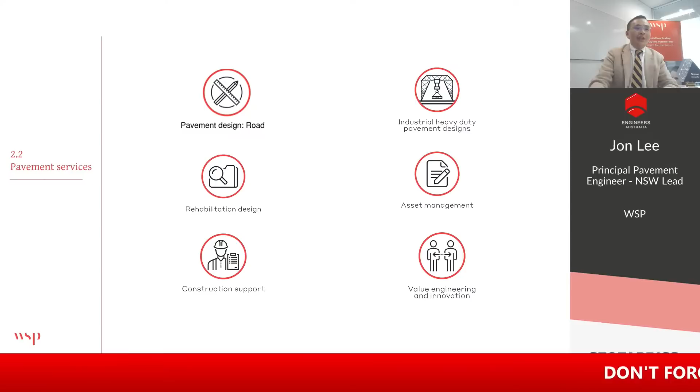So for the first, this is the one in the job, say the pavement services we're providing. Yep, similar to the last one.

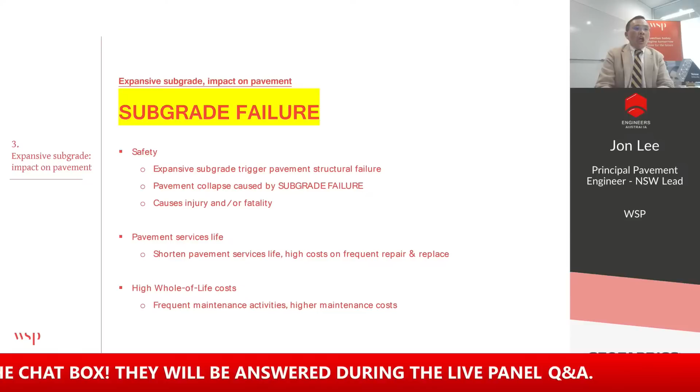For us, the major issue with soft, expansive subgrade is subgrade failure. When the subgrade fails, we lose the support of the pavement, and once it loses support, we cause safety issues, which can cause life or injury. It's a serious impact.

For that part, it's our responsibility to provide a safe design and safe output as well. The next thing is, even if the pavement is still functioning with some distress, we need very frequent maintenance, which means we add on the cost.

Just like I showed at the start, whole of life is a very important aspect. It's not just design and construction—maintenance is a key part as well. So overall, for our output, we need to make sure we have functional deliverables and effective cost.

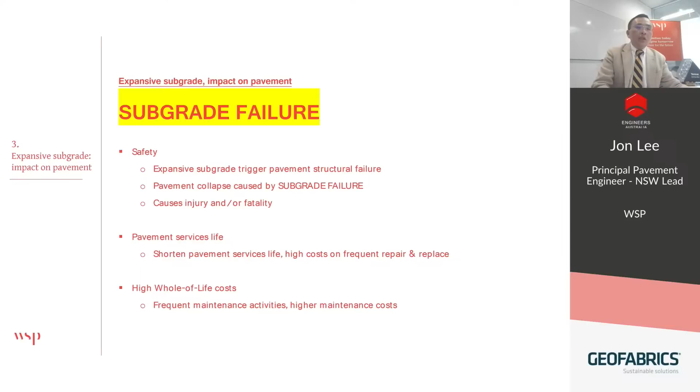Right now, allow me to share some photos of a failed proof roll, because this has been through the proof already, and this happened last year when we had over 200 days of rain in New South Wales.

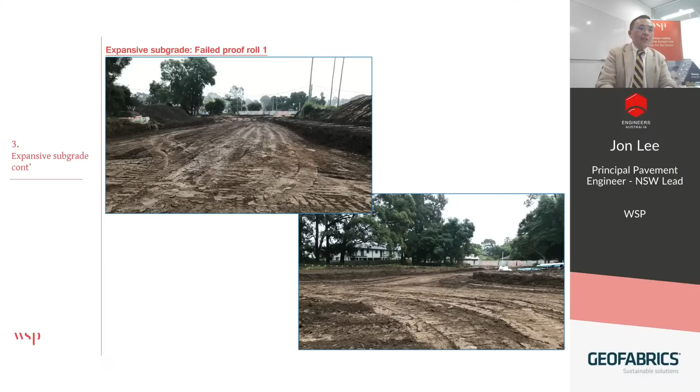So we tried our best to dry the subgrade and make sure of things as well, and we still came up with an issue—after we did compaction, proofing, and stuff, it still looked like this. More photos of that as well.

So for us, we're not taking chances. For a situation like this, there are two approaches. First, we don't have the luxury during rainy days to wait for it to dry, because it delays the construction process. At the same time, we need good quality control, just like my colleagues said.

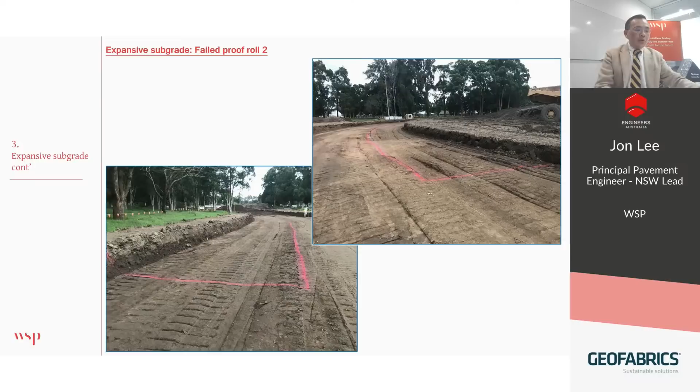One thumbprint on failed proof roll is a huge room of improvement in subgrade remedial works. For us, we need to get things right. For the next step, allow me to show some examples.

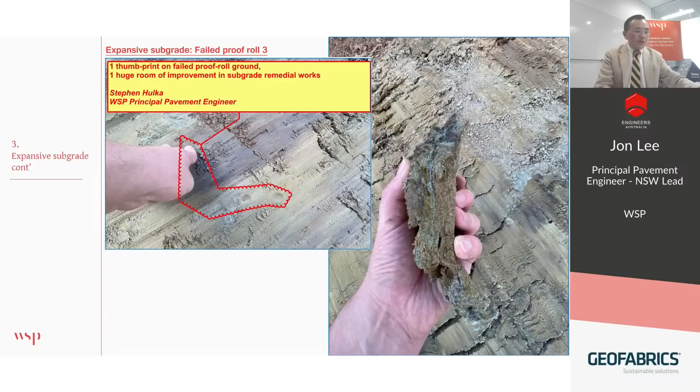First one, like I mentioned before, when I do a new road for Transport New South Wales, this is the design approach. I need to work together with Geotech and study the bore logs, the CBR lab tests as well. The key is when we find soft areas, we need to comply with the Austroads Guide to Pavement Technology Part 2, also the transport supplements to Part 2.

Then we apply the layer called control subgrade layers. Whether or not we do in-situ stabilization, maybe lime or cement, we determine case by case with the project requirements.

The key point is, on top of the stabilized layer—here we have 300 mil—we also need to put the Tensar TriAx TX100 or equivalent on the original subgrade. I'll discuss this further later, but bear in mind we have a few choices here.

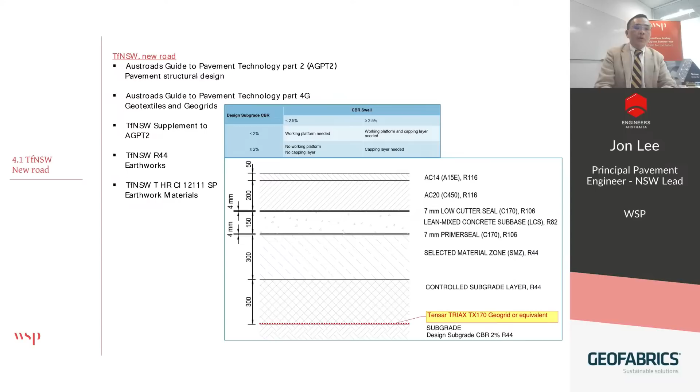First thing is one or two layers of geogrid, where you put the geogrid on two layers, and in between, in-situ stabilized materials—whether we choose lime or cement. We'll go further into this in Q&A.

For the next one, this is for the boundary. For maintenance work, we might not have the luxury like greenfield sites with one meter and all that. So for brownfield or contaminated areas, we might have very limited area and excavation depth to work with.

For maintenance work or rehabilitation, on top of the geogrid, we need to make sure the subbase or the materials we put back are synthetic. The key is that these are self-compacted, so we have less disturbance to the original ground. Think about this - for this line, you have services over there. It can be existing services, or even if not, we might not have the luxury to say that gas pipe is 1 meter away, or other services 600mm away. So we need to work together with utilities, drainage, road designers to file integrated design.

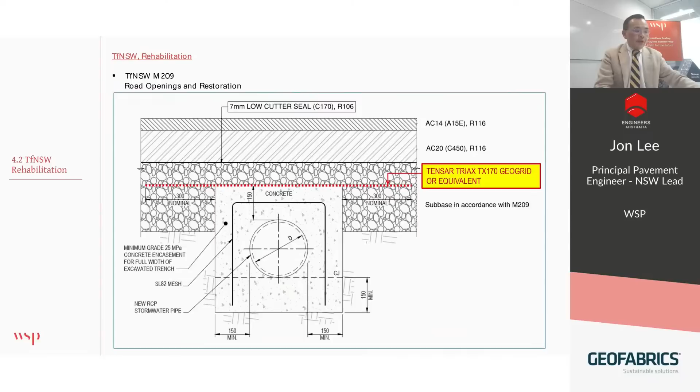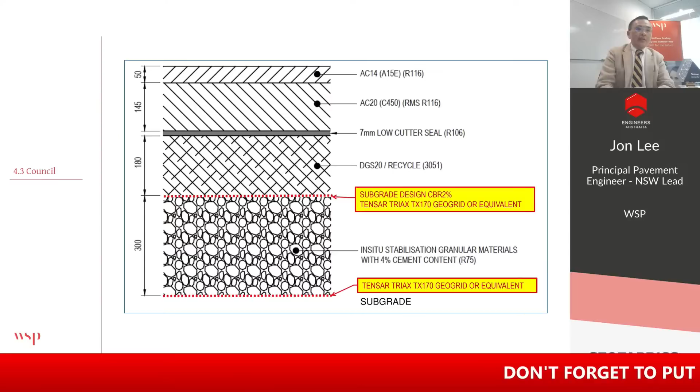For the next one, this is for a council job, and this profile is being delivered during the times of heaviest rain, for approximately 200 days or so. So as I mentioned, we don't have the luxury to wait for it to dry. So we're keeping a balance - we're looking for 2 layers of geogrid, with cement stabilization as well. It's massive, and the key is in the end, we're able to get these pavements constructed. That's the reason I'm doing the lesson with the asphalt and stabilized material, because in that situation, I'd say this is an appropriate design approach.

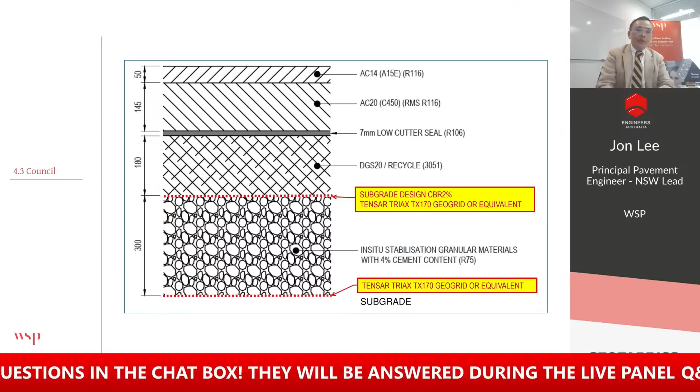One tip as well, which I mentioned in the conclusion - when we do a proof roll, don't put the geogrid down and do the proof roll. You just waste your effort and waste the money, because after the proof loading and stuff, it will ruin the geogrid.

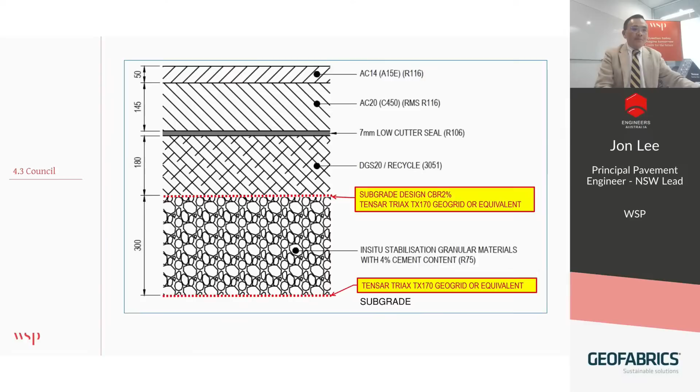This one I'm just going to touch briefly - this is for the port project we have done as well. Make sure we put that geogrid and the stabilized materials on the subgrade level as well, because the key is, especially for heavy loadings, we need those. It's not the same mode like a road where it's 8 tons in one direction, we can expect 4 tons - it's for all directions as well. So we need to make sure we have a safe design for that approach.

Most importantly, for all design, one of the key things is we need to make sure there is a sufficient subsurface drainage system, to get the water out from the pavement layer and make sure there's less chance of it becoming saturated. This is our key role, because once it gets saturated, it fails, and they lose upstream - they will come with a subsequent knock-on impact.

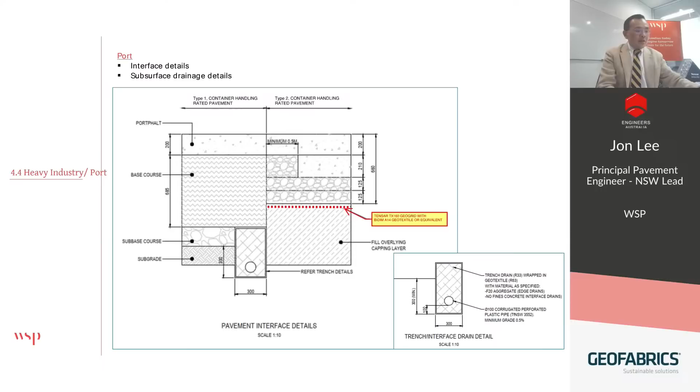Okay, thanks for that so far. This is the one I'm going to share with you - we can talk more on Q&A as well.

First thing - for those stabilization work and geogrid work, it's not a strict design approach or deliverable to minimize the excavation depth. In a greenfield or based on project requirements, it's not the way to say 'I want less earthwork,' unless we have a very good reason, like contamination in the area or utilities we need to consider. We can't just do it that way - cost saving alone is not a strong reason to go for less excavation depth.

As a designer, my standing point is I need to design fit to purpose and meet the requirements of the design standards, specifications, and project requirements. Here I borrow the idea from rail - SFAIRP. For my deliverables, I have to ensure it's as far as reasonably practical, because like I mentioned before, if I produce good drawings but the contractors can't construct it, I'm causing trouble instead of being a problem solver. So we need to bear this in mind.

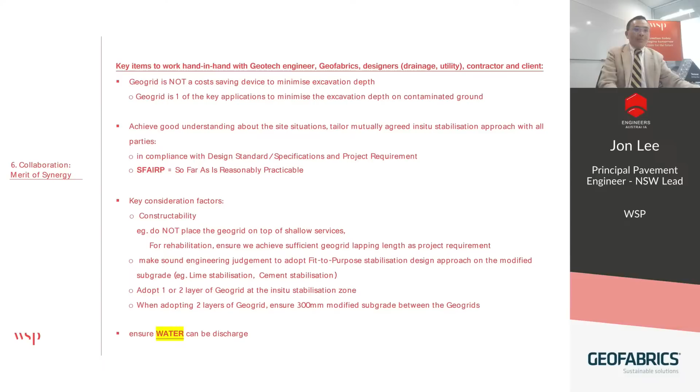That's the key points for us today. Thanks for that, and I look forward to answering more questions during the Q&A. Thank you.

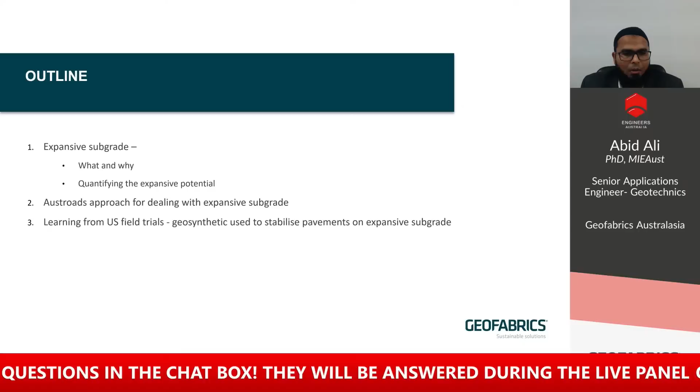The outline of today's presentation is as follows. First, I'll talk briefly about the problem of expansive subgrade and why it is a problem when it comes to pavements, and also how the expansive potential is generally quantified. Then the recommendations given in standards for dealing with expansive subgrade, what we can learn from field trials carried out in the US where geosynthetics were used to stabilize pavements on expansive subgrade, a numerical study undertaken to understand the benefit of mechanical stabilization for pavements on expansive subgrade, and geosynthetics which can be used for pavements on expansive subgrade.

In conclusion, so what is an expansive soil? An expansive soil is a soil that swells on wetting and shrinks on drying.

So why is it a problem when we construct pavements on it? In pavements, generally most of the moisture changes tend to occur towards the edges and less towards the centerline. This gives rise to a differential volumetric change across the width of the pavement. So when the subgrade swells on wetting, there's more swelling towards the edge and less towards the centerline. Similarly, when the subgrade shrinks during dry season, there's more shrinkage towards the outer side and less on the inner side. This gives rise to differential movements across the pavement.

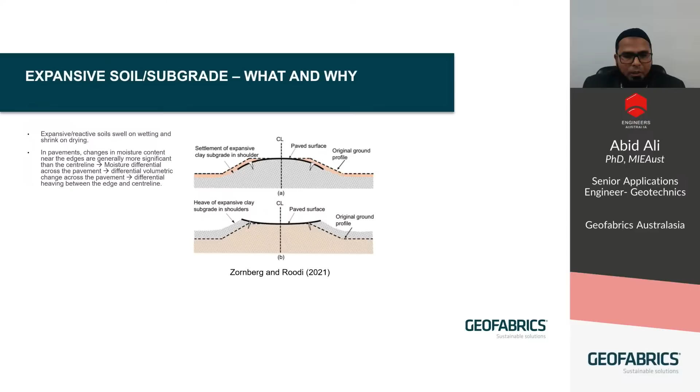Now, when the pavement is subjected to repeated cycles of wetting and drying, this can impose significant stresses on the pavement and cause it to crack longitudinally, as we can see in this figure.

The damage caused due to expansive soil is estimated to be between 9 to 15 billion US dollars in the US alone, and half of that comes from damages to pavements on expansive subgrade. In South Australia, the damage is valued at $1.46 billion for houses constructed before 1981, and it results in $20 million per year for water main breakages and $60 per square meter for pavement repairs for a local city council in Adelaide.

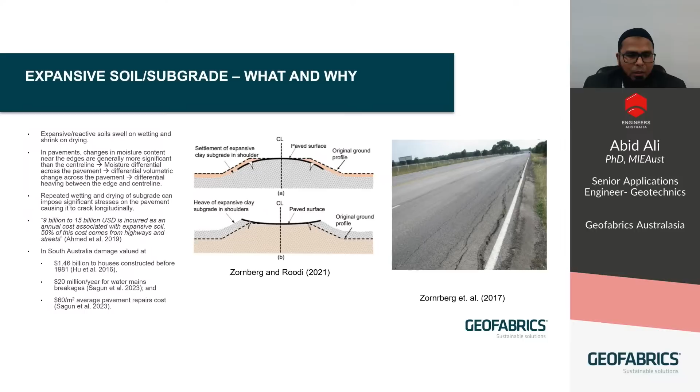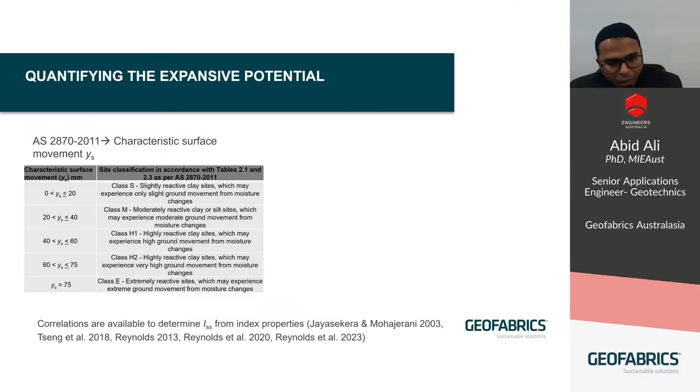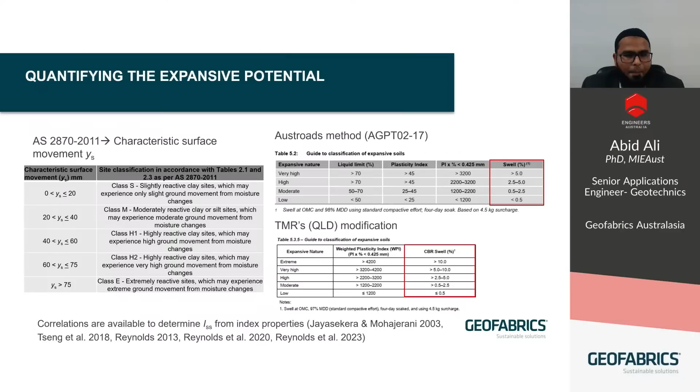All right, let's look at the approach given in Austroads for dealing with expansive subgrade. If you look at the Austroads Guide Part 2, a number of recommendations are given in clause 5.3.5 dealing with expansive subgrades, but there is no mention of geosynthetics.

A common practice is to use a minimum amount of cover material of low reactivity. This approach is called the cover method.

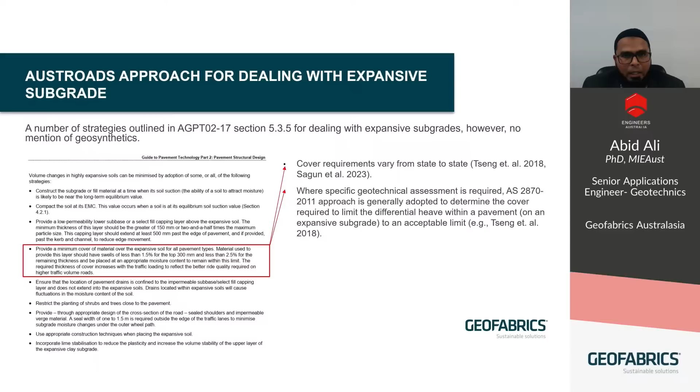The cover requirements vary from state to state, and where specific geotechnical assessment is required, the AS2870 approach is generally adopted to determine the cover required to limit the differential heave to an acceptable limit.

The cover thickness depends on several factors such as the depth of suction change (HS), the crack depth, presence of any bedrock or water table, the shrink swell index used to determine the characteristic surface movement (YS), the acceptable differential movement, as well as the design traffic.

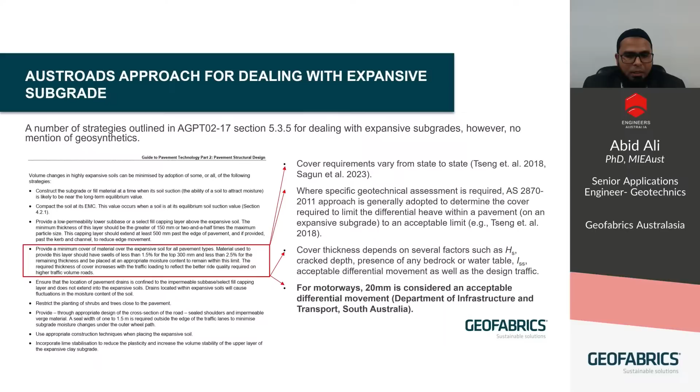For motorways, 20 millimeters is generally considered as an acceptable differential movement.

Now let's look at a few terms or mechanisms which are quite important to understand when it comes to pavement geosynthetics in expansive subgrade.

When we talk about pavement geosynthetics, the term reinforcement is quite commonly used. From a pavement perspective, this means that a geosynthetic is anchored at two ends, and when a vertical load is applied, it undergoes deformation and mobilizes a tensile response, providing some sort of benefit. So for reinforcement, there are two things to note: tensile strength is important, and deformation is required to provide any benefit.

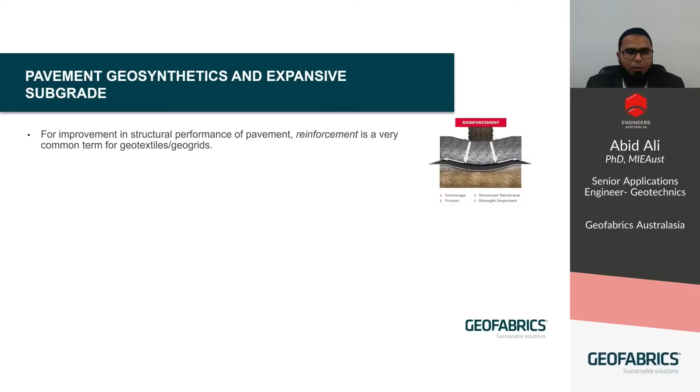The tensile strength is not important for stabilization to take place. Rather, the soil geosynthetic properties are important, and the geosynthetic interacts with the soil and improves the properties of the soil. Therefore, deformation is not required within the geosynthetic, in contrast to reinforcement.

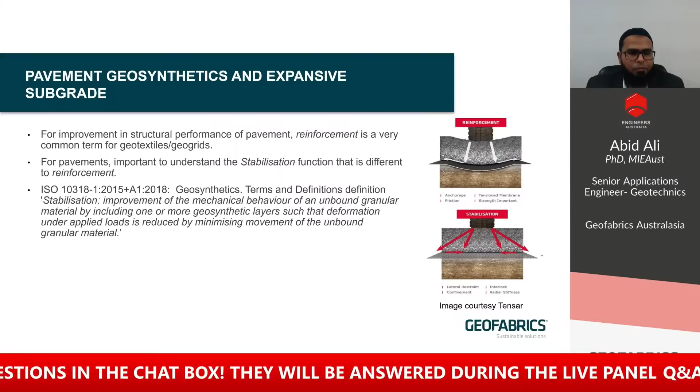So in today's presentation, we will see how geosynthetics can help pavement on an expansive subgrade by way of mechanical stabilization, and another function, by reducing the moisture differential across the pavement.

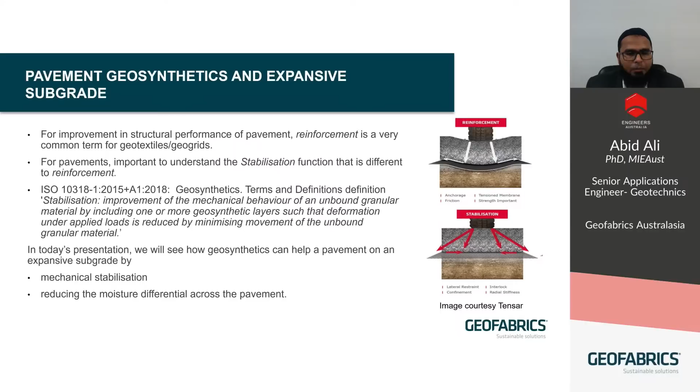So in the field trials reported in the paper, 5 sites were monitored in Texas, USA, and a variety of geosynthetics were used: biaxial geogrids, multi-axial geogrids, and polypropylene geosynthetics.

All case studies were located between a TMI of -20 to a TMI of +20, meaning a suction depth ranging between 3 to a meter and a half. The pavements were generally uncurbed, crowned at the center line, and sloping to the sides with V-shaped ditches on either end of the road.

It's important to note that each test section within a case study had the same environmental conditions and vegetation. The pavement performance for each test section was quantified in terms of a parameter called the longitudinal crack index, among other parameters.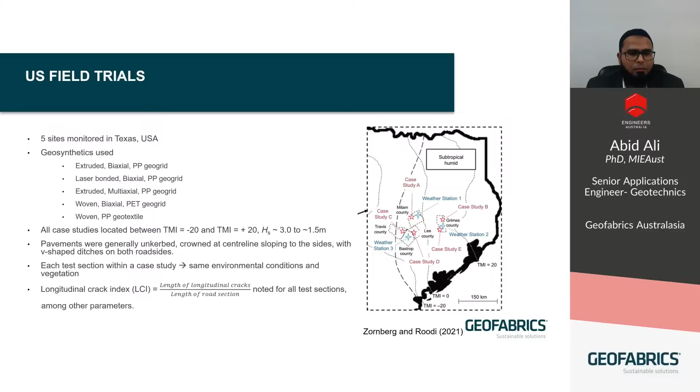So let's look at the first case study, which is FM1774. The average annual daily traffic at the time of construction was 1100. The PVR for site B1 varied between 30 to 65 millimeters, and for site B2 varied between 30 to 45 millimeters.

PVR, or potential vertical rise, is a measure of the reactive movement of a site, and this approach is generally adopted in the US.

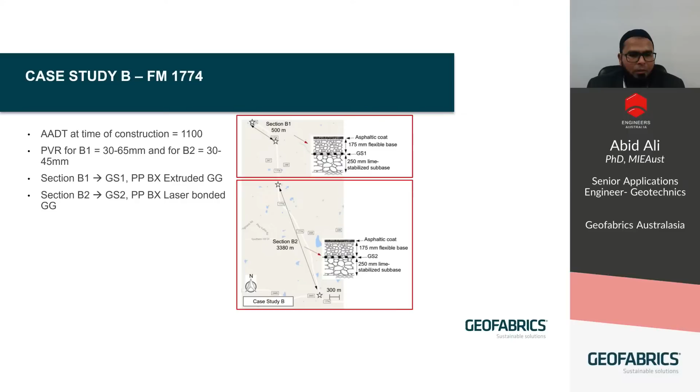So section B1 was where a polypropylene biaxial extruded geogrid was used, and in section B2, a polypropylene biaxial laser bonded geogrid was used. Both the geogrids met the Texas DOT spec for geogrids.

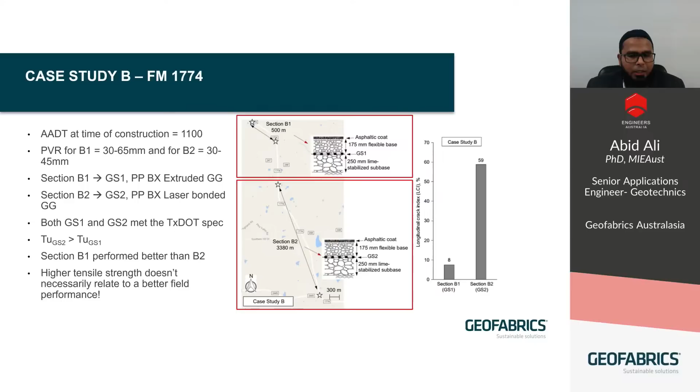It must be noted that the tensile strength of GS2 was greater than the tensile strength of GS1. But if you look at the field performance, section B1 actually fared significantly better than section B2. This leads to the understanding that higher tensile strength doesn't necessarily relate to better field performance.

Let's look at the next case study, from State Highway 21. In this case study, 5 sections were analyzed. The average annual daily traffic at the time of construction was 5,300. No PVR information was available for this case study.

The liquid limit varied between 40 to 58, and the PI between 26 to 41. The subgrade was classified as a highly plastic subgrade. Out of the 5 sections, biaxial geogrids were used in 2 sections, D1 and D2. In the remaining 3 sections, multi-axial geogrids were used. Again, it must be noted that the pavement thickness is the same in all the sections.

What is noted based on monitoring of field performance is that multi-axial geogrids resulted in better pavement performance compared to biaxial geogrids.

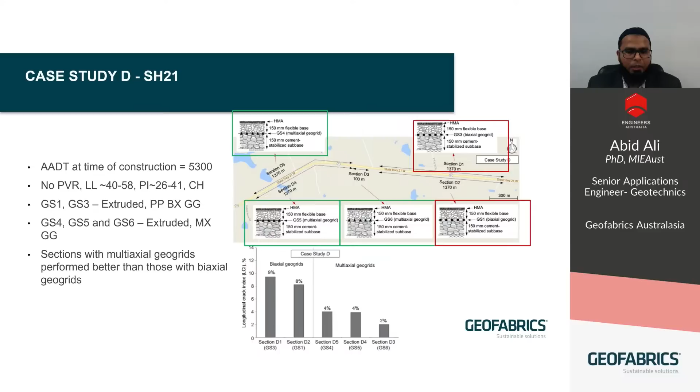So what do we learn from the US experience? From case study B, we learned that higher tensile strength does not necessarily relate to better field performance. Rather, it is important to understand the geosynthetic soil composite properties. And from case study D, we also learned that multi-axial geogrids performed better than biaxial geogrids.

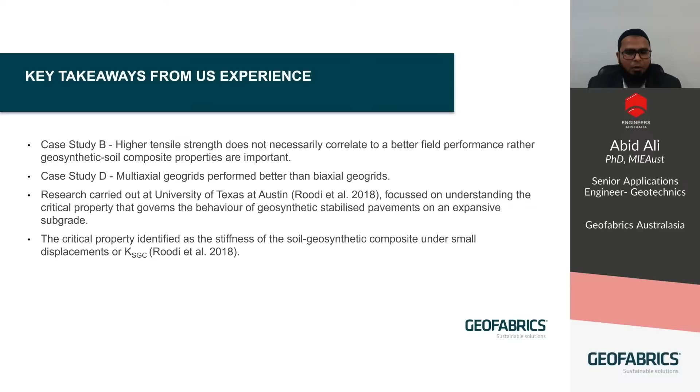Further study was undertaken at University of Texas at Austin to understand one single parameter that correlates well with field performance. The critical property was identified as the stiffness of the soil geosynthetic composite under small displacements, called KSGC.

Now, based on the lab testing carried out to determine KSGC and based on the field performance, it was noted that multi-axial geogrids had the highest KSGC and they resulted in excellent field performance. The geosynthetic benefit in the US was characterized by the longitudinal crack index.

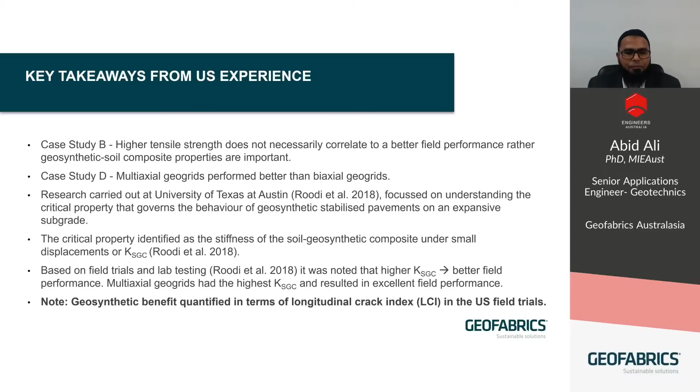Now let's look at a problem where the reactive movement of a site is 80 millimeters, the depth of suction change is 2.5 meters, and the crack depth is half the suction depth. As per AS2870, to limit the differential heave to 20 millimeters, we would require a cover greater than 1 meter.

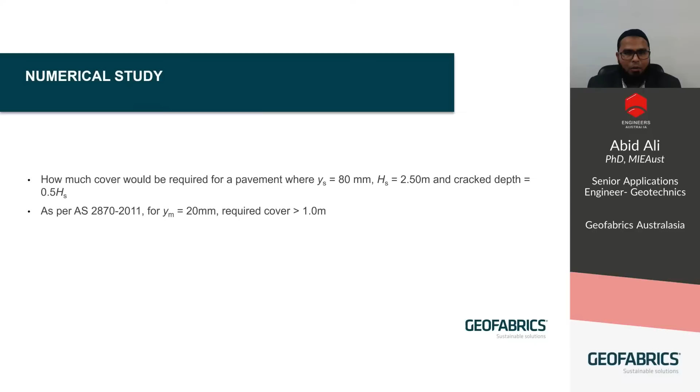So in this study, we are trying to quantify the geosynthetic benefit in reducing the differential heave, and if the required cover can be reduced by adopting geosynthetics.

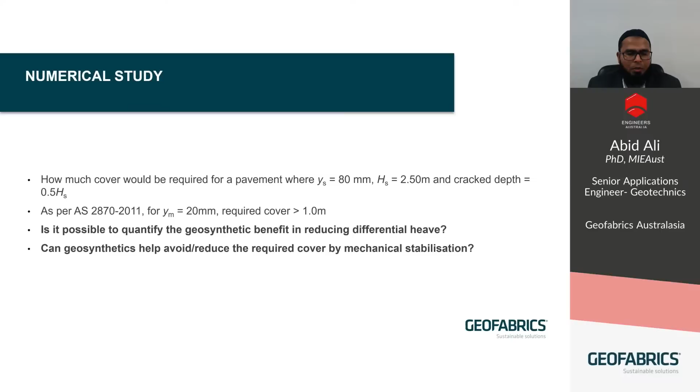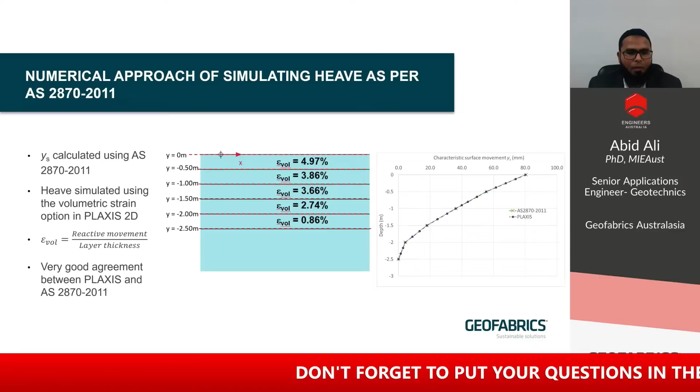In this approach, the characteristic surface movement Ys was calculated using AS2870, and it was numerically simulated using Plaxis 2D by the volumetric strain option. As can be seen in the figure on the right, a very good agreement can be observed between the heaves predicted as per AS2870 and that obtained from Plaxis.

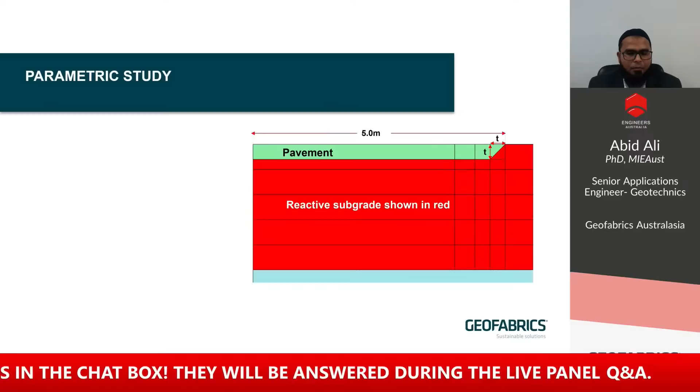So we undertook a parametric study where three different pavement thicknesses were analyzed. The pavement width was 10 meters and we only modeled half the pavement width.

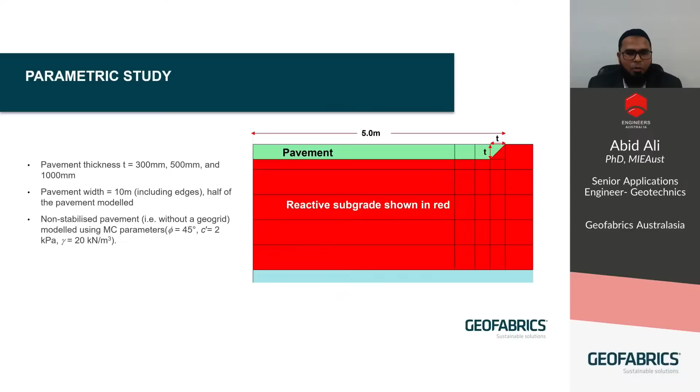A non-stabilized pavement, or a pavement without the geogrid, was modeled using Mohr-Coulomb parameters as shown, and a mechanically stabilized pavement was modeled using a special constitutive soil model called TSSM. The PSD of the material for which the TSSM parameters were adopted is shown here as well.

The elastic stiffnesses for both the pavement types were kept the same.

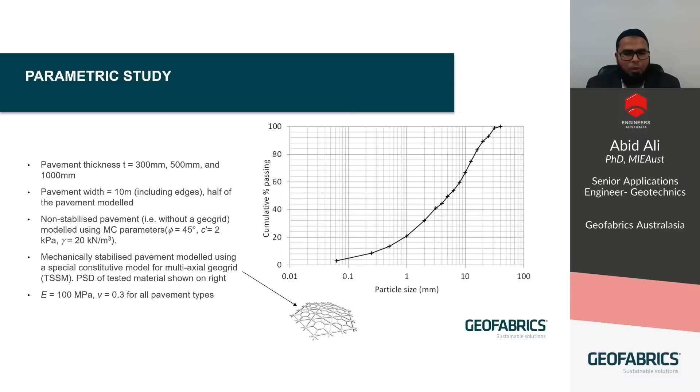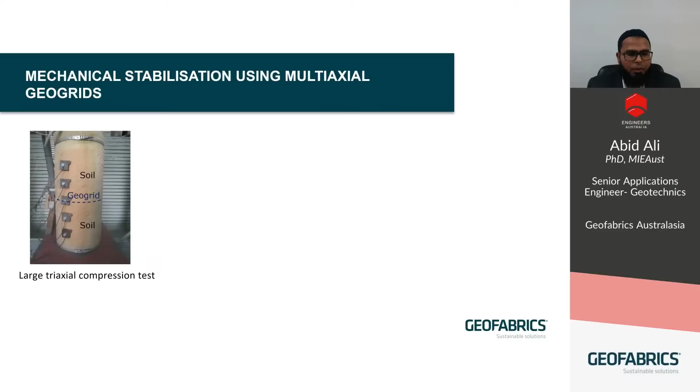In order to quantify the benefit of mechanical stabilization using multi-axial geogrids, large triaxial compression testing is required. This is not the regular sized triaxial sample; it is a large triaxial one where the diameter is half a meter and the sample height is 1 meter. Tests are carried out with and without the geogrid. When the geogrid is used, it is placed at the mid-height of the sample.

Based on the large triaxial testing, it is noted that when the geogrid is placed in the sample, there is an increase in shear strength, and the sample exhibits greater ductility, meaning it fails at larger strains.

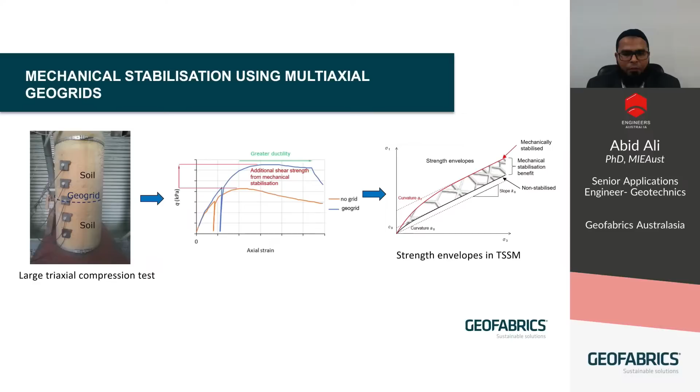Now, this behavior is incorporated into the Tensar stabilized soil model. The strength envelope shown in red is applicable to the location of the geogrid, whereas the strength envelope shown in black is applicable to the areas outside of the zone of influence of the geogrid. The difference between the two is the mechanical stabilization benefit.

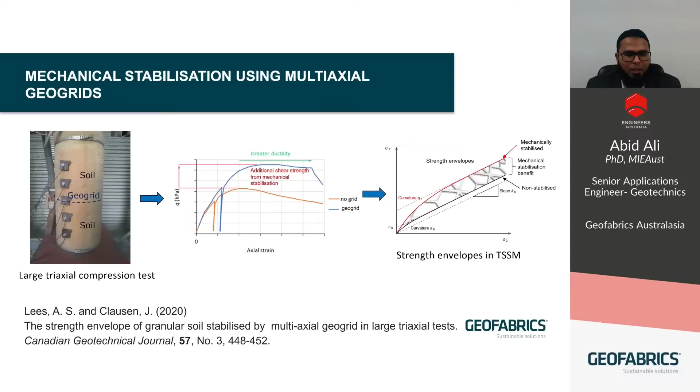For those who are interested in knowing more about TSSM, they can refer to this publication.

If you look at the results of the 500 millimeter thick pavement, the total heave at the pavement center line is the same for both mechanically stabilized and non-stabilized pavements. The differential heave for the non-stabilized pavement is in good agreement with what we get from AS2870, but the differential heave of a mechanically stabilized pavement is significantly reduced.

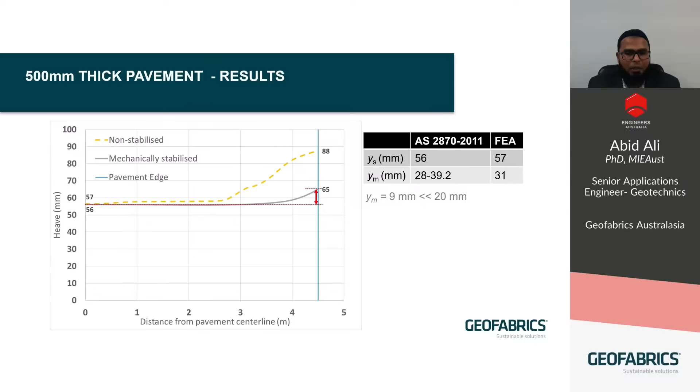In this video, we will see that when a non-stabilized pavement is subjected to heaving, large strains are induced in the pavement. Naturally, the pavement is more susceptible to longitudinal cracking.

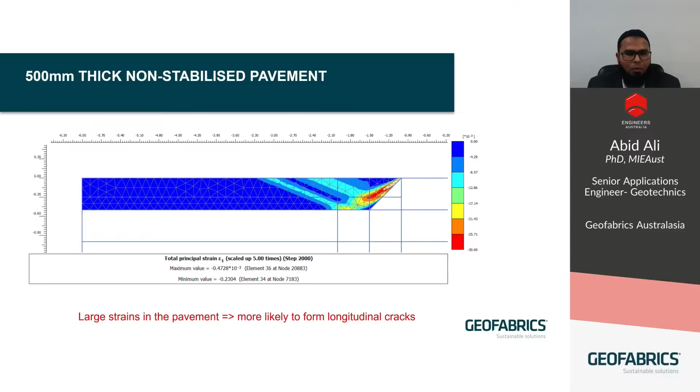On the other hand, when a mechanically stabilized pavement is subjected to heaving, significantly lower strains are induced in it, and therefore the pavement is less likely to develop longitudinal cracks.

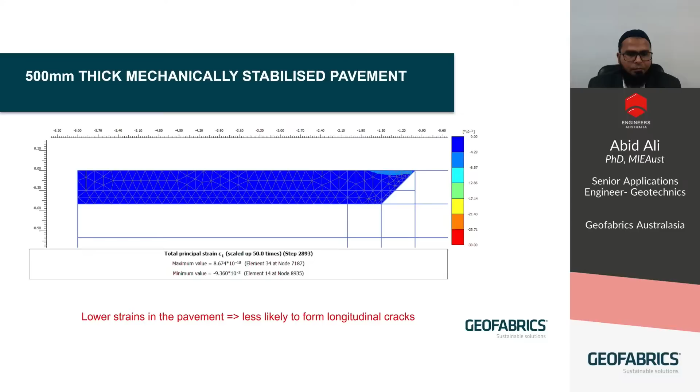If you look at the results of the 1 meter thick pavement, the total heave for both the mechanically stabilized and non-stabilized pavements are quite similar and in close agreement with the values obtained from AS2870. But the differential heave for the non-stabilized pavement is quite high compared to what we get from AS2870.

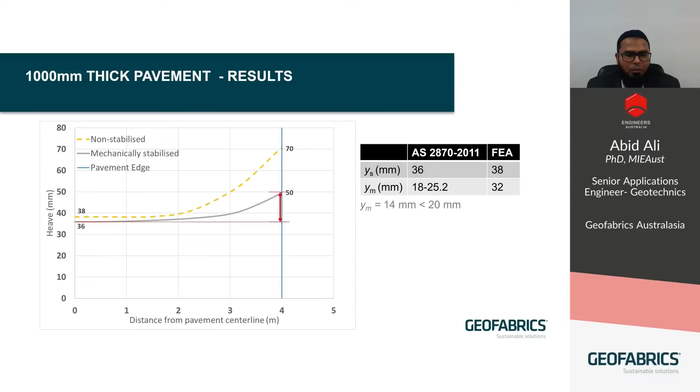The interesting thing is that the differential heave from the mechanically stabilized pavement is only 14 millimeters, which is again lower than the 20 millimeter acceptable limit.

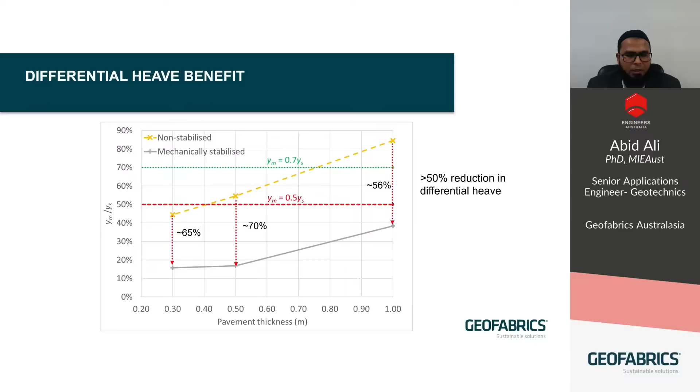If we plot the normalized differential heave on the y-axis and the pavement thickness on the x-axis, we can see that for all the pavement thicknesses analyzed, mechanical stabilization can reduce differential heave by more than 50% for the same thickness when we compare it to a non-stabilized pavement.

So let's look at some geosynthetics for expansive subgrade.

This is the first generation multi-axial geogrid, also called a triaxial geogrid because it has triangular apertures, and this is what was used in the US field trials. John Lee also mentioned about these geogrids.

Then we have the next generation multi-axial geogrids, which is a co-extruded and multi-aperture multi-axial geogrid. These geogrids were used in the numerical study that I just presented.

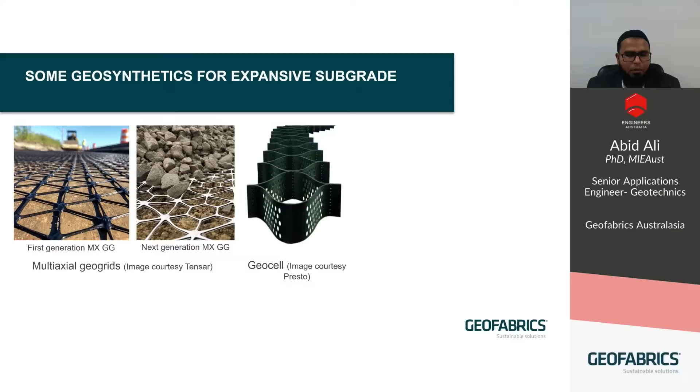Then we have geocells, which can also be used for mechanical stabilization. And lastly, an interesting product called the enhanced lateral drainage geosynthetic, which we will see in the next slide.

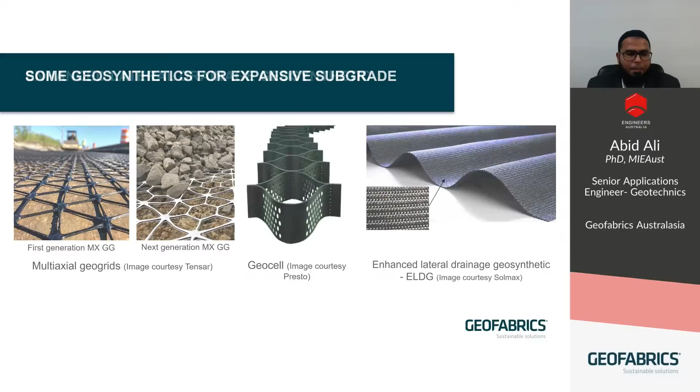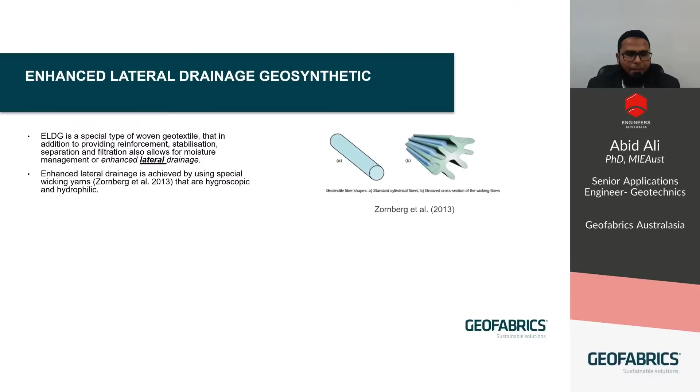So, what is an enhanced lateral drainage geosynthetic? It is a special type of woven geotextile that, in addition to providing reinforcement, stabilization, separation, and filtration, also provides an additional function of moisture management or enhanced lateral drainage. And that is possible by use of special wicking yarns that are hydrophilic and hygroscopic.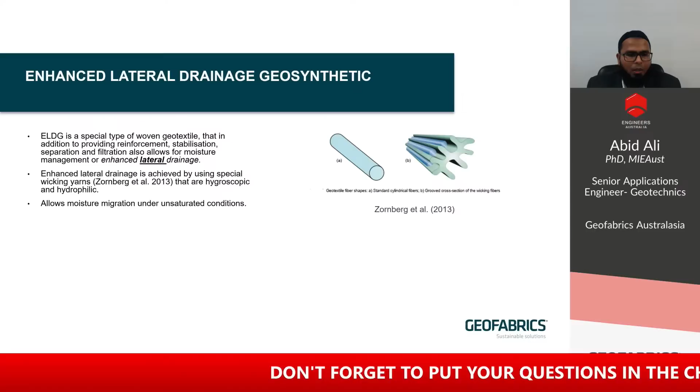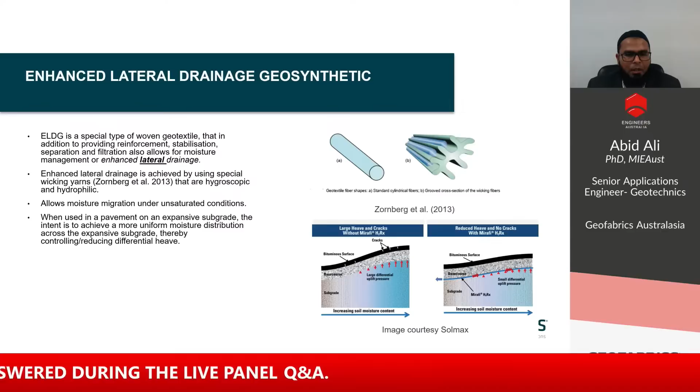An ELDG allows for moisture migration under unsaturated conditions. The intent of using ELDG in a pavement on an expansive subgrade is to achieve more uniform distribution in moisture content across the pavement, and by doing that, the differential heave will also be reduced.

Now, this has been verified by field trials carried out on State Highway 21, and this statement summarizes the key findings of that research. In summary, the ELDG is able to prevent cracking in the shoulder by equilibrating moisture beneath the geotextile through enhanced lateral drainage.

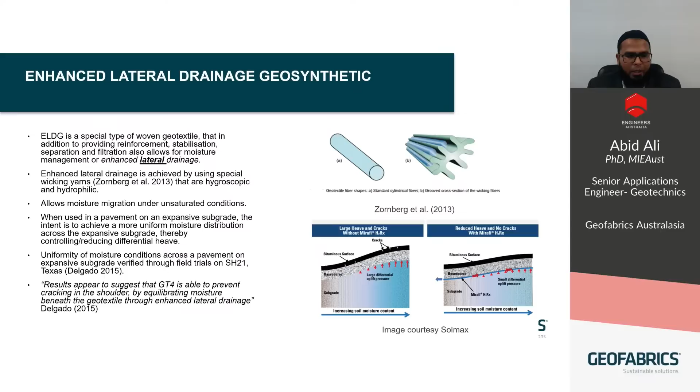So that brings me towards the end of my presentation, and I would like to conclude with the following points.

Based on the research carried out in the US, high tensile strength does not necessarily correlate to better field performance. Rather, it's the soil geosynthetic composite properties that should be considered. And multi-axial geogrids had the best soil geosynthetic composite properties, or I should say the highest KSGC values, and they resulted in the best performance in the field.

Now, based on the numerical study that we carried out, it can be said that mechanical stabilization using stiff co-extruded multi-aperture multi-axial geogrids could help reduce differential heave by 50%, and therefore it may potentially overcome the need to further thicken the pavement to achieve an acceptable differential heave of 20 millimeters.

We have undertaken further work to evaluate the influence of different parameters on the numerical results.